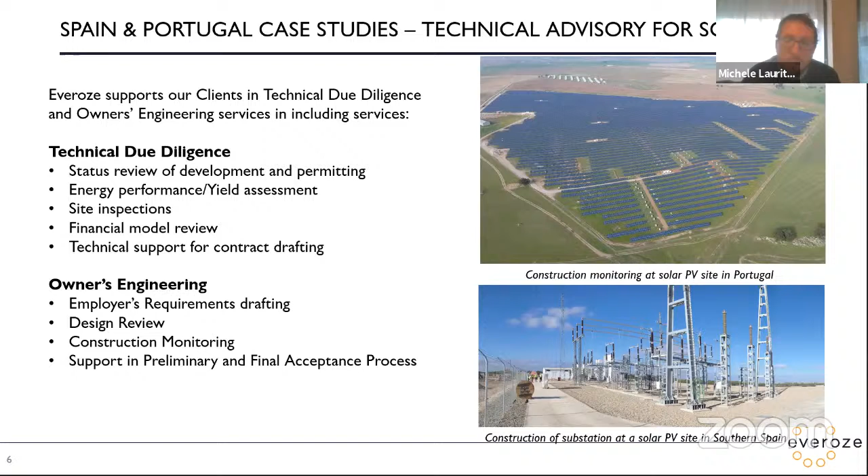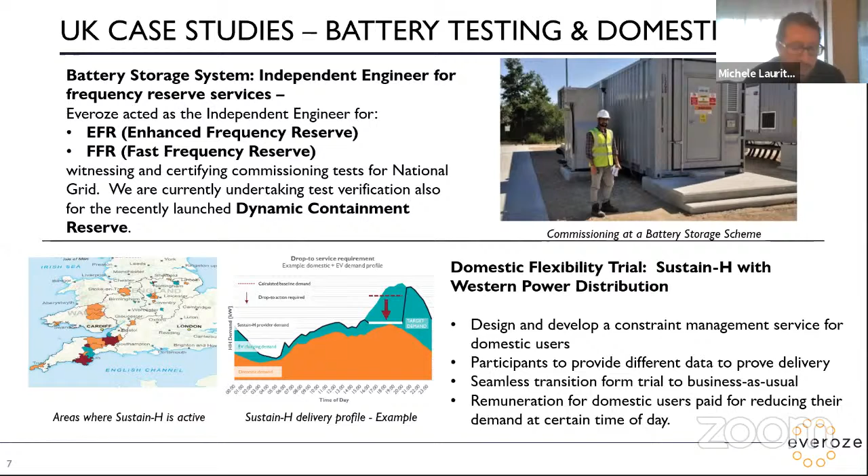And the last brief case study is something on flexibility, and it's actually quite interesting because it could be interesting for all of us, maybe in some time, and it's domestic flexibility. So domestic users, basically all households, provide grid services. Sustain H is a trial service that was launched by Western Power Distribution two weeks ago, and we supported them in designing and developing it through business partners, which are basically the suppliers. And the idea is very simple: enable every domestic user who has a battery to provide a grid service and be remunerated for this. If you want to read more, this is published on our LinkedIn as a blog. So it's quite fresh news.

And I just show a bit who our main clients are: investors and lenders. Also, we work with developers and sometimes also asset management companies and EPC contractors.

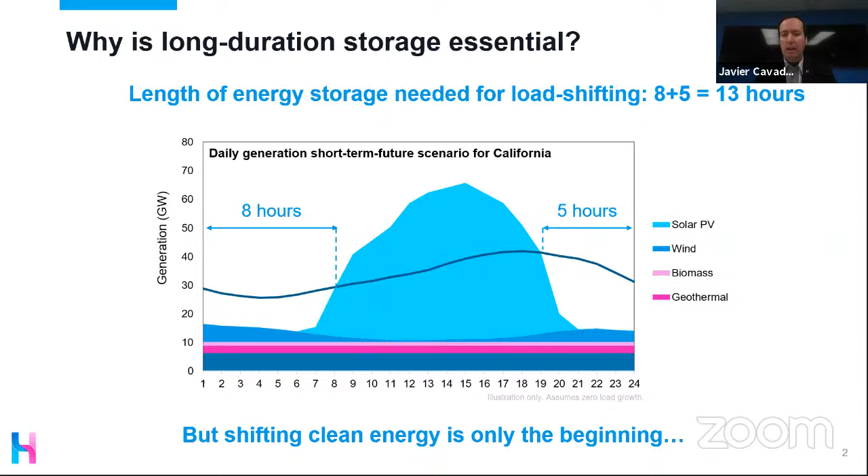Highview Power has had two plants running in the UK for many years, at smaller and middle scale, 15 megawatt hours, and now we are constructing the largest in the world with close to 300 megawatt hours. I will come to that. But if we look at long duration storage today, 2021, 2022, what is available? I start from the right.

Compressed air, as you know, is compressing air and placing it in a cavern, and it's a wonderful technology. When you need it back, you expand it and move an air turbine and a generator. But it's limited by geology, a lot of land survey, a long development. So if you find a place, great technology. In the center, pumped hydro.

Pumped hydro today is 99% of the global gigawatt hours installed, while lithium ion has been installed quite massively in these last five years. In gigawatts, pumped hydro is over 95%, but in gigawatt hours, meaning duration of storage, it's 99%. As you know, pumped hydro demands big site-specific characteristics. You need the valley, the water, the height, a lot of civil construction, and a minimum of 10 years of development.

Going to the left, Highview Power developed cryogenic energy storage, liquid air. It's a solution that takes the benefits of the two previous ones, pumped hydro and compressed air, but what it uses is tanks. Instead of high pressure, it's just cooling down until it liquefies: nitrogen, liquid oxygen, all blended. When you need it back, you just blow the air to a steam turbine and a generator. So today there is nothing more economical.

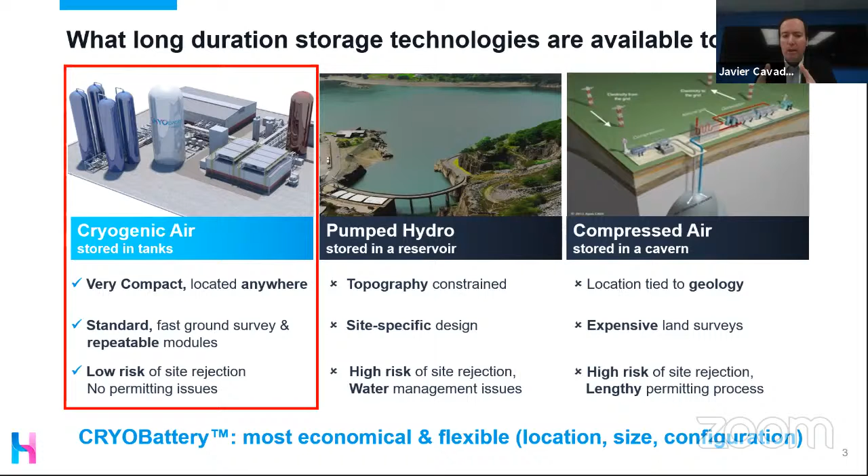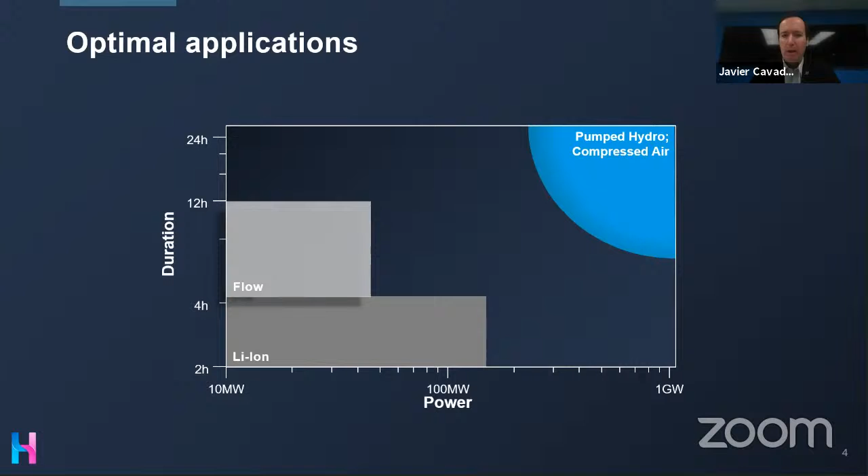But this technology is not occupying the space of pumped hydro or compressed air, and is not really competing with shorter duration, domestic scale, or up to 100 megawatt, one hour schemes. This technology occupies the center. We move from 4 hours onwards, and our sweet spot gets bigger the more hours we go. 6 hours is way better than 4. 8 hours is way better. 12 hours is way better. With 20 hours, we can have weeks of storage. The grid normally is really safe with 8 to 16 hours.

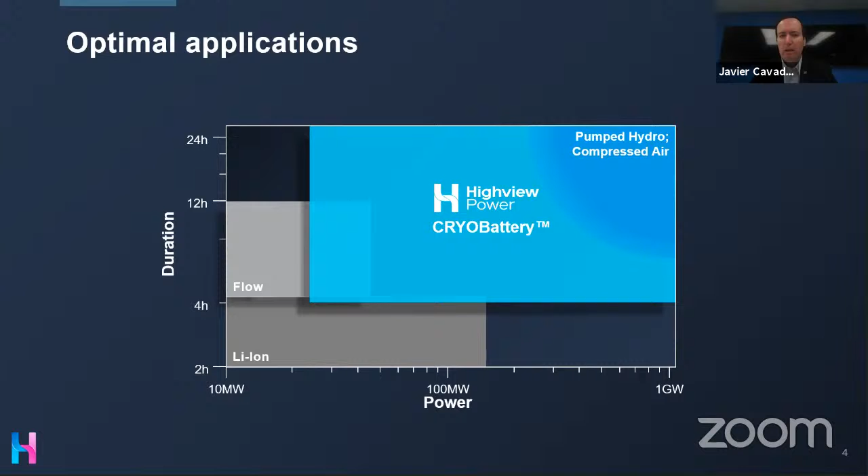And we go bigger scale because our main partners are people like Siemens, MAN, Sumitomo, General Electric. Component manufacturers with global presence and Spanish presence, so every component can be sourced locally.

How the process works: like any other battery, it has a charging station, a storage station, and a discharging station. The charging station is a liquefaction plant, like an air separation unit. Many we have in Spain, many we have in the UK. Storage are stainless steel tanks, and the discharge is a steam turbine that is using air, so no humidity, no difference of temperature, and a big generator.

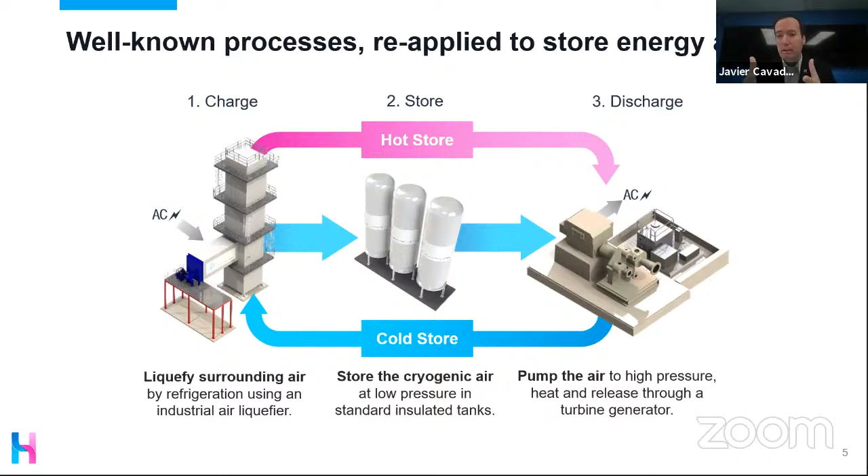And we recycle the heat and the cold in the system. So it looks physically like an LNG terminal, but no combustion, no emissions. This is a picture of a 300 megawatt hour plant, so it's 50 megawatts for 6 hours. We have multiple plants in execution. We have already a plant in construction in Manchester.

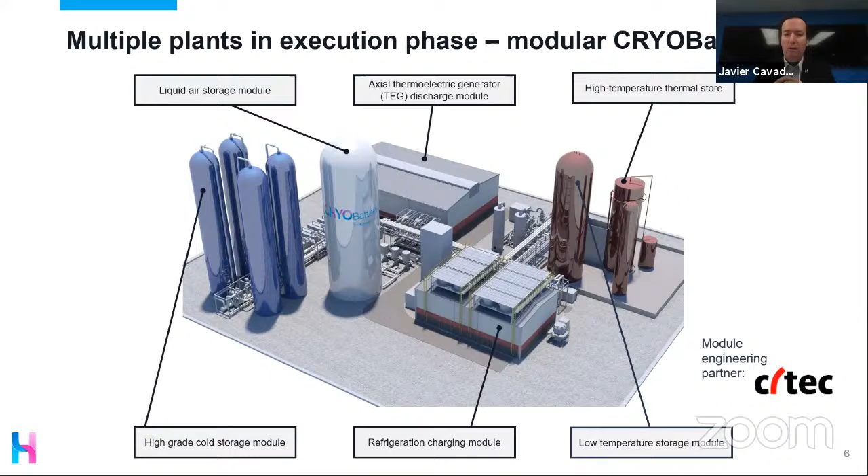Marianne was mentioning the Prime Minister and the UK government launching last week the 10 point plan for a green revolution in the United Kingdom. We were very honored that the Prime Minister mentioned Highview, our technology, and this project that we broke ground on a couple of months ago in a large power station outside Manchester.

California, as I mentioned, today, on the 1st of December, is closing a large tender process seeking 500 megawatts, minimum 8 hours, maximum 16 hours. And we are talking only about community choice. So the time of long duration, larger scale energy storage has just started.

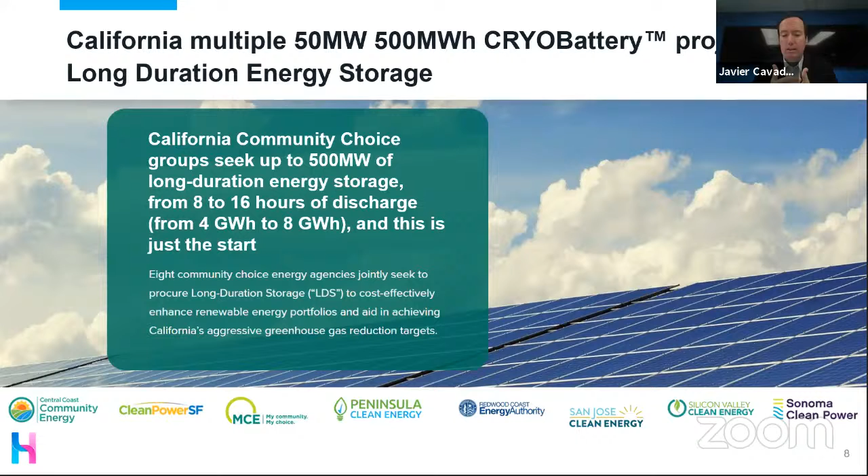So again, Highview Power has created a battery, an energy storage system that replicates pumped hydro and has all these advantages, that does the job of a thermal station. It has dynamic inertia: your generator, your turbine, your compressors are rotating, so you have a lot of mechanical inertia, you provide reactive power, and you provide all the services that gas or thermal would provide. And again, without water impact, zero emissions, and no hazardous materials.

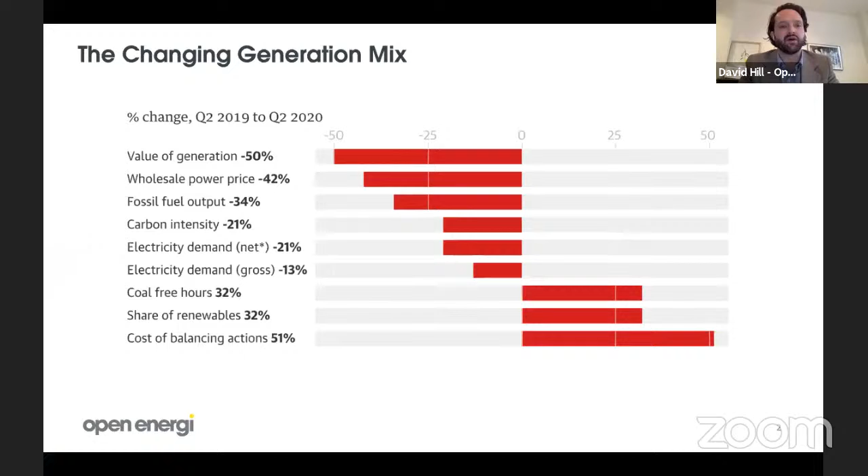And we see that there's going to be a broad range of different types of technology, from batteries, energy storage, electric vehicles, demand response, and gas peaking plants. And what we believe at Open Energi is absolutely vital is all of these assets will require automated optimization, because at an individual level most of these assets are going to be a lot smaller than gas CCGTs. And therefore we will require software to optimize these assets and not humans.

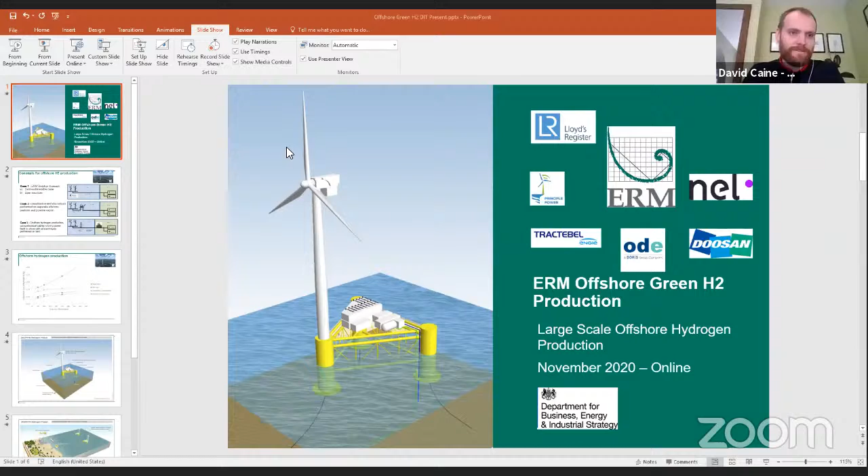Hi everyone, my name's David Caine. I work for ERM, a sustainability consultancy. We've supported a number of low carbon projects around the world, including solar PV and offshore wind, all sorts of different low carbon renewable projects. We're a global company with about 5,500 people worldwide, including offices in Spain, in Madrid and Barcelona.

My background is in oil and gas originally, but for the past 4 or 5 years I've been working in the hydrogen sector. We've worked on a number of projects looking at the feasibility of converting the gas network in the UK from natural gas to hydrogen. We've also worked on projects looking at production of hydrogen from natural gas, which is blue hydrogen. We've looked at the potential deployment options for hydrogen for end users, including things like trains and the conversion of the commercial sector in the UK, as well as looking at the role hydrogen can play in bringing constrained assets to market.

One of the projects that I wanted to pick up on today is the Dolphyn project, which is looking at combining offshore floating wind technology with hydrogen production technology. We're working on that project at the moment. We've been working for the past 18 months with the support of the UK government through the Department for Business, Energy and Industrial Strategy, along with a number of companies. The project is focused on what role hydrogen could have when combined with offshore floating wind technology.

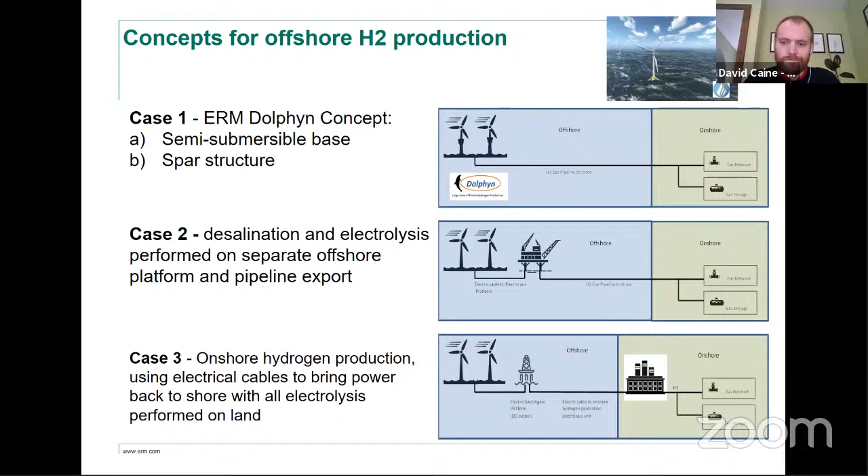The results that came out of that were quite interesting. The scale we looked at was 10 megawatt production units in a 4 gigawatt array - very large scale, looking forward to that kind of 2050 zero carbon scenario. What role could hydrogen and this technology play in the future?

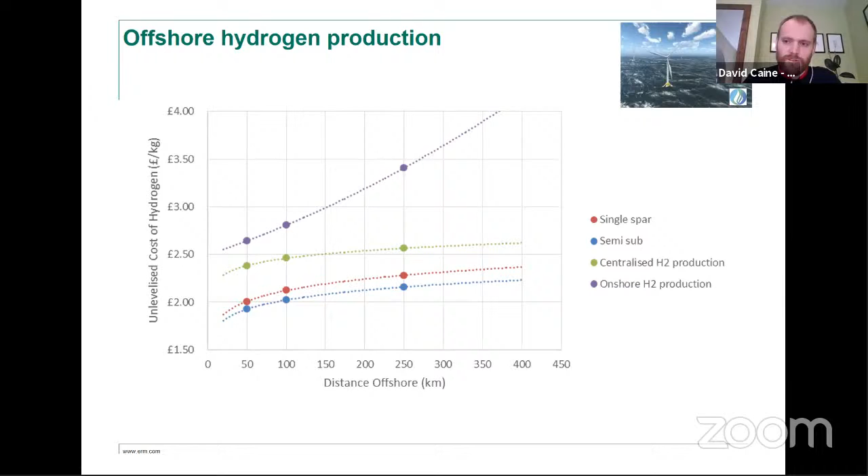The results from that were really encouraging. The modular unit, which is the one we selected, gives the lowest cost of production of hydrogen at around £2 a kilo, which is a low price - really exciting. That's the kind of price where you can start to talk about hydrogen competing with natural gas through the main gas network. That typology, the modular approach to combining hydrogen production with wind production, was the cheapest option we looked at, for a range of reasons.

To say a little more about the unit itself that we've selected - this is the design we've taken forward. We're now currently in FEED, going through engineering design of a 2 megawatt scale unit, which will be located in the North Sea, just off the coast of Aberdeen. For that unit, seawater is taken in, desalinated, purified, and fed into an electrolyzer unit. We've got a wind turbine generator supplying power to the electrolyzer, and out of that we have very high purity hydrogen being produced, taken to a buffer storage tank before export through flexible riser and then pipeline.

So it's combining some offshore oil and gas technology with offshore renewable technology, plus a bit of innovation to bring it all together. The unit is completely off-grid, so to operate it needs all of the backup power systems, emergency power systems, and grid balancing systems needed to operate this kind of system in an off-grid environment.

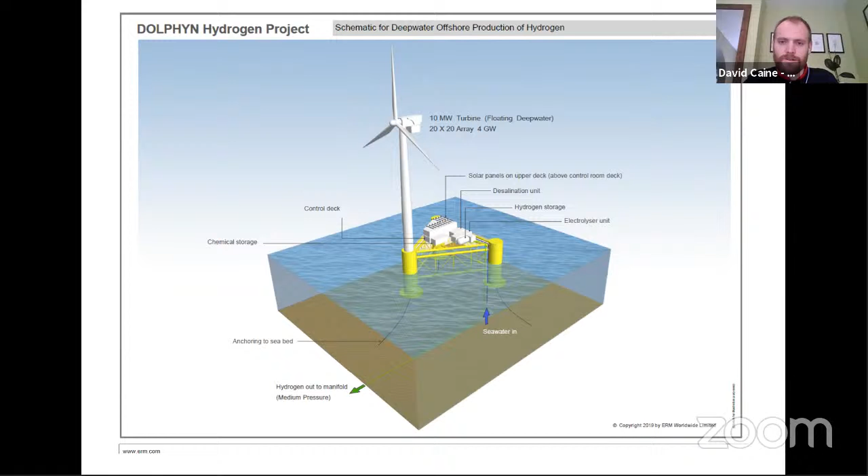With the first couple of units we're looking at bringing on - like I said before, the starting point for the project was to look ahead to that 2050 time frame and ask what role could hydrogen have in the future. We've satisfied ourselves that hydrogen can have a good role alongside other low carbon technologies.

The UK government, and other governments across Europe, have also identified the potential that hydrogen can have, and I think that's reflected in the kind of policies going on. I think the areas where this technology is developing best are the ones where there's a good public-private relationship, and that's part of the success we're seeing in the UK. I think really the most interesting projects now are those first projects - what can we do in the 2020s when there isn't a mature international hydrogen market yet?

To start with, you're possibly not going to be looking at supplying hydrogen directly into the gas network. But when you bring hydrogen onshore, then there's a number of different end users that can start to use hydrogen as early adopters, things like fuel for transport, marine and port infrastructure, as well as commercial applications.

And for some of those, the cost of hydrogen doesn't need to be as low to be competitive in those markets. So there are ways of getting early projects that are looking ahead to a 2050 scenario where you might be supplying hydrogen into a gas network, but the early projects in the 2020s still have a

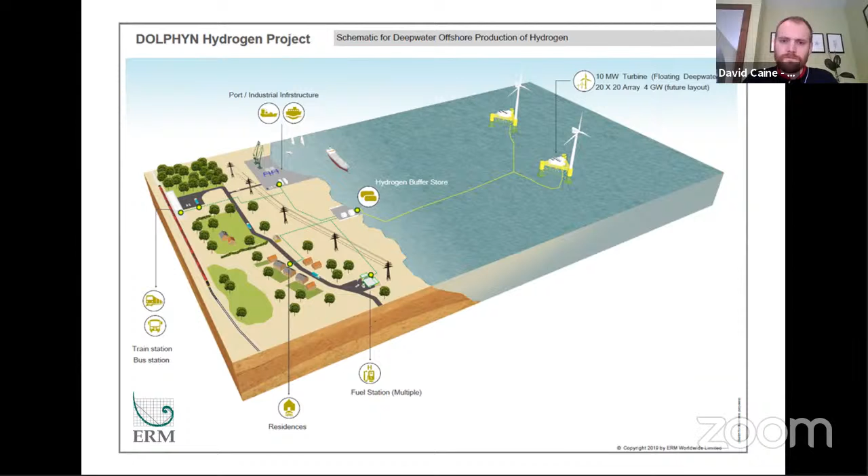route forward of supplying into other markets in the early stages. So that's a whistle-stop tour of the project, just to give a bit of an insight. And if people are interested in the Dolphyn project more, there's some contact details up there. And I look forward to joining in the panel discussion later on.

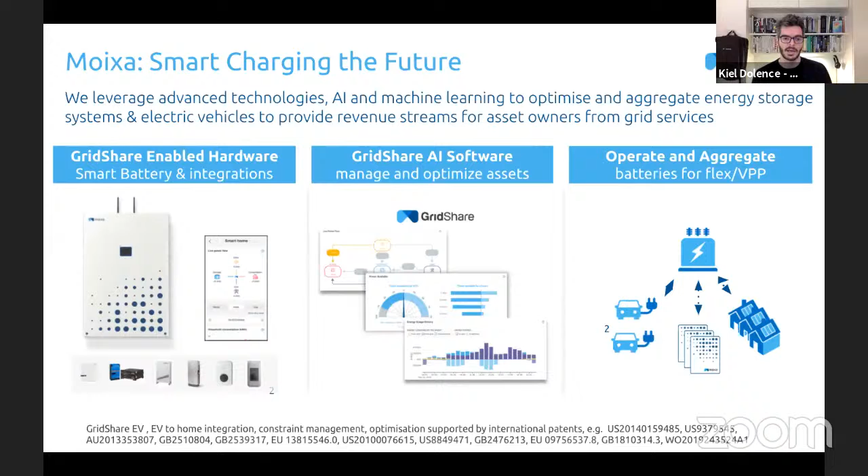We have a platform called GridShare, and why that's important to this group: it's the combination of solar in partnership with storage and electric vehicles. We started making our own batteries, so we're deeply familiar with the chemistry and physics and limitations of batteries in the market, and we've moved into a very deep machine learning software platform where we have large international partners across a couple of continents now, to maximize the return on investment for their products, such as electric vehicles, electric vehicle charging equipment, and energy storage, primarily behind the meter in residential settings.

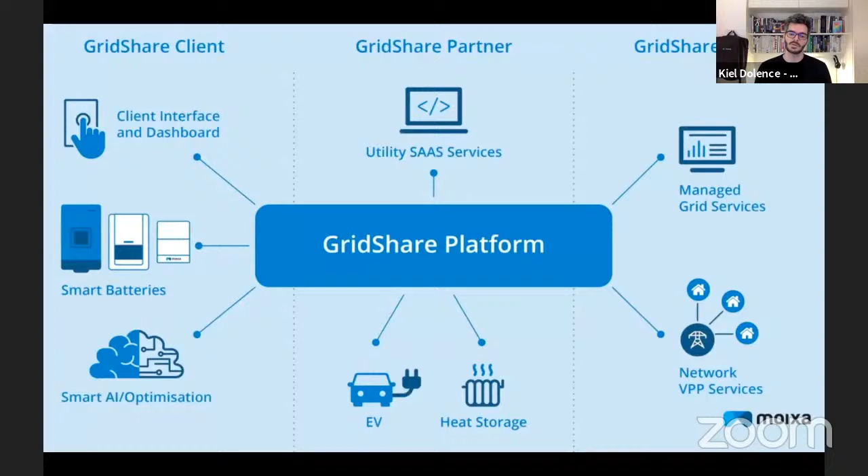The GridShare platform's USP for us is the deep AI that we've developed over the past few years, and I'll get into that briefly in a moment. It controls across a hardware agnostic range of assets, aggregates those, and we have a few commercial contracts where we're actually providing those services from an aggregated domestic fleet into energy markets here in the UK as well as Ireland.

So first, I think we're scalable. It's very, very difficult to coordinate fleets of megawatts of assets, let alone when they are spread across tens of thousands of homes. We've got almost 25,000 in Japan at the moment. We're hoping to crack that before the end of the year. It looks like we're on track there.

And also we've partnered with Honda to help deliver their energy business across Europe. So again, we're in UK, Ireland, and Japan, a couple of trials in Germany, the US, and Canada, and looking at the Spanish market to bring our software with our hardware partners into that space sooner than later.

Starting at the top, we want to make sure that things get installed correctly. So we've developed an install app that makes sure that we're reducing the amount of truck rolls back to homes that are moving into the solar space, getting electric vehicle equipment installed, getting batteries paired with their solar systems. We know the pain that it causes to sell a system and then 2 weeks, 2 months, or 2 years later have to go back because something wasn't put in correctly and you found out after the fact.

So we start there, right from the very beginning, from day one, making sure that products are going in correctly. After the products are in, we've got the necessary tools to aggregate those assets, make sure they're working as efficiently as possible, identifying any issues with individual systems, and then being able to aggregate those assets and move them into various power markets.

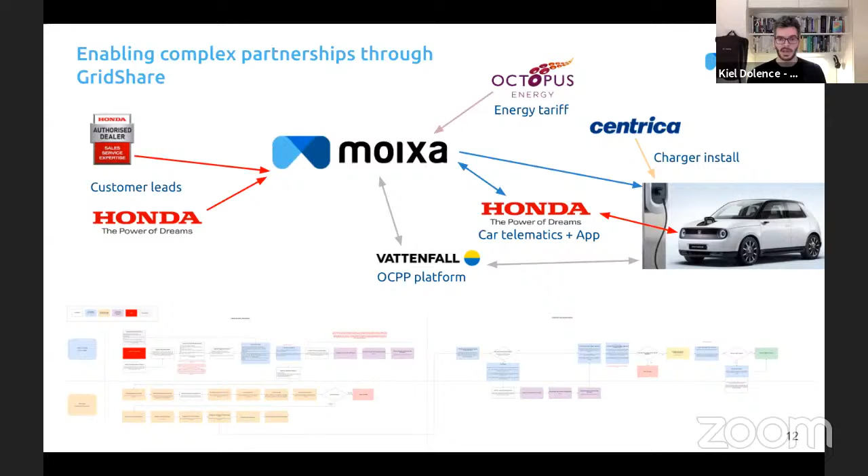And just last but not least, to show that we've been at this for a really long time, we've been in the energy management and machine learning optimization game for a long time. We have a lot of patents dating back to 2007, 2008. This is something that we're obviously very passionate about. We've been around for a long time, so for a startup to have 12 or 13 years under their belts with big Japanese investors, I think it just signals that we're going to be around for a really long time, and looking forward to hearing a little bit more about the Spanish market and how we can help some of the folks on the call.

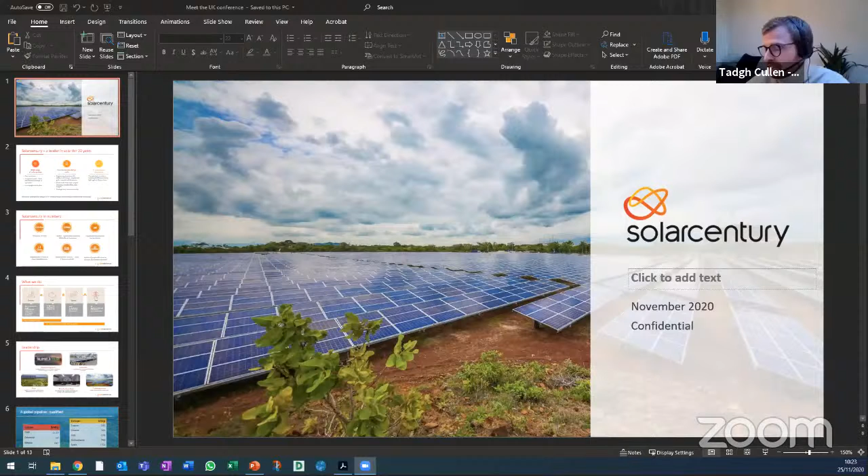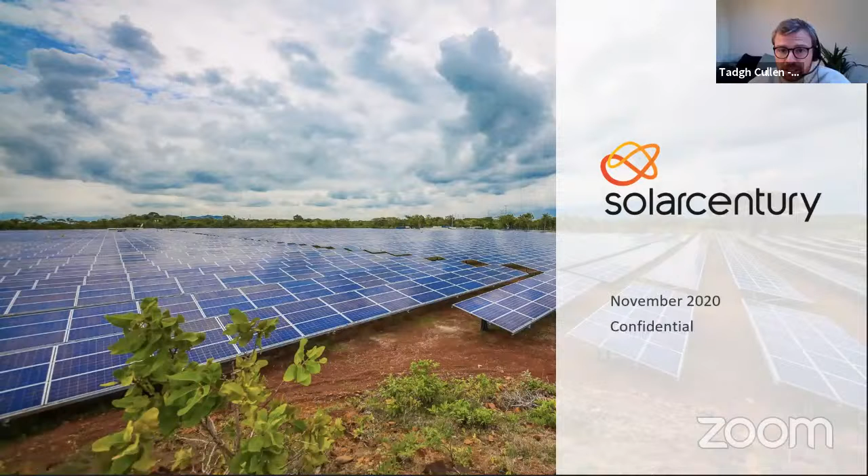I think the content has been very varied and interesting so far. So first of all, I will fly through a few slides about SolarCentury. So we've worked in PV for over 22 years. We've deployed 1.3 gigawatts of PV with a 6 gig pipeline and an EBITDA for the last financial year of 23.6 million. We've evolved to manage each stage of a project, from the development, EPC, origination, financing, and asset management stages.

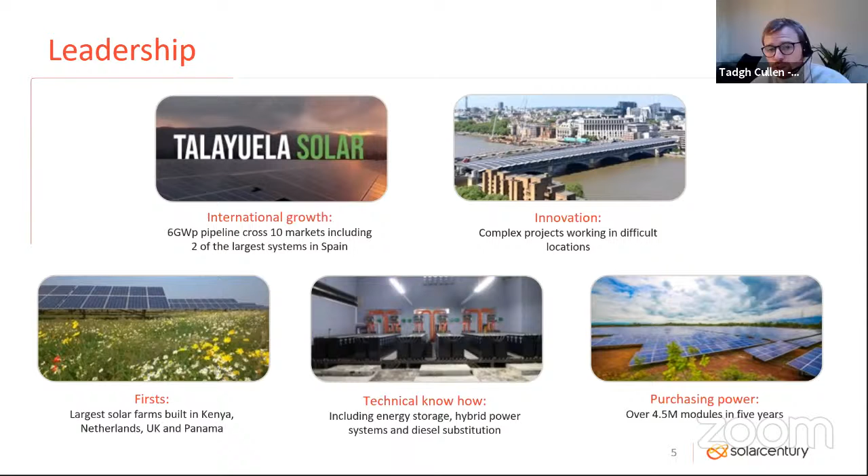We have completed a number of flagship projects in our 22 years, with two of the largest systems in Spain, Talayuela Solar, a 300 megawatt project, and La Cabrera, a 200 megawatt project. Two very different hybrid systems in Eritrea and Mombasa Airport, where we utilize a mixture of energy storage and solar PV to either form or maintain an electricity grid.

So Spain is one of our strongest performing countries with a pipeline of 1.7 gigawatt peak. But there is a problem in Spain, a problem that's been highlighted by many of the speakers previous to this. There is currently a very strong corporate PPA market that by design does not incentivize flexibility.

A proposed new CFD structure that will aim to build more than 3 gig per year for the next 5 years at least, but no incentives to manage the volatility that will increase due to the significantly increasing renewable energy penetration. Renewables will put historical fossil fuel generation out of business, and that reduces the ancillary services pool that Red Electrica can currently call for free.

So this leads nicely into looking at what makes storage work. So ultimately, three things. We have investor confidence, energy market volatility, and an effective single buyer market. A single buyer market is a model such as balancing services or capacity markets that allows us to sell to a single buyer, in our case, the TSO.

It's a model that shields financiers from market risk, reducing financing costs, which is critical to making a viable energy storage system work, and effectively making an investment commercially bankable. So let's look at what some countries have put in place to incentivize flexibility.